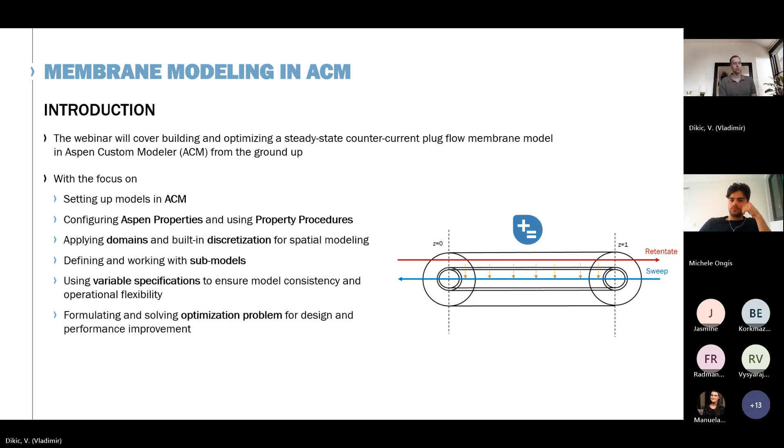So today our specific topic is building and optimizing a steady-state countercurrent plug flow membrane model in ACM, and we're going to look into how to set it up in ACM, how to configure Aspen Properties, but also use Aspen Properties procedures, how to apply domains and use the built-in discretization for spatial modeling, also defining and working with submodels using variable specification, and also formulating and solving an optimization problem in ACM.

Just quickly, so what is ACM? For anybody that's not used it before, it's an easy-to-use tool for creating, editing, and reusing models of process units. So you build your own simulation applications and you combine them in a graphical flow sheet.

You can perform dynamic and steady-state simulations. You can use parameter estimation, optimization, and all in an equation-based manner. So Aspen Custom Modeler provides a systematic way to model and also solve distributed parameter systems in which process variables vary both in space but also in time. And these systems are very common in engineering and science, and they're described mathematically by partial differential equations.

So the big benefit of ACM is that it includes a wide range of numerical solvers, so different discretization methods, nonlinear solvers, and optimization algorithms. What's also a big benefit of ACM is that it includes Aspen Properties. So anybody who's worked with Aspen Plus is familiar with this, and they can also be directly used in ACM, which...

...going to look into the 1D countercurrent flow membrane model. So in terms of the assumptions, it's a 1D model. In terms of the components, we're going to look into CO, CO2, hydrogen, and water. We're assuming a hydrogen selective membrane. We're also assuming isothermal conditions, and we're not going to consider pressure drop.

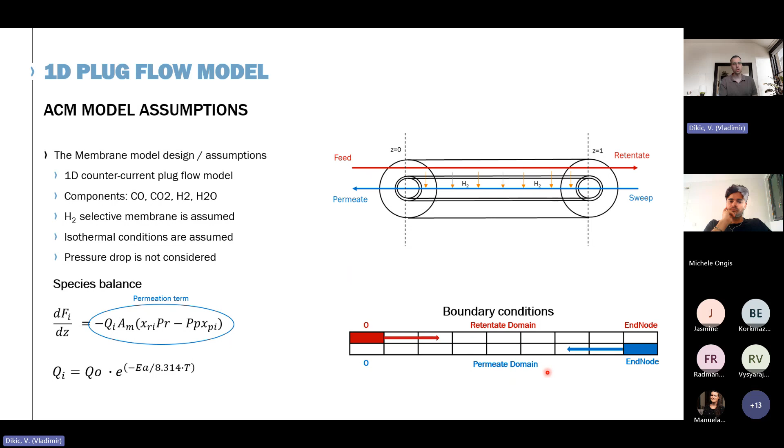So one on the retentate side and one on the permeate side, where on the retentate side, we're going to specify our boundary conditions at 0, and on our permeate side, we're going to specify our boundary condition at the end node. For this sort of a problem, we need to use 2 different domains with 2 different discretization methods, but I'm going to talk a bit more about it later.

So this is a very basic membrane problem, but you can actually do a lot more in ACM. So I'll just show you quickly also what I've been working with for the past few years. So in terms of the 1D model, you can also look into how to describe a full system geometry, the temperature and pressure effects. You can look into the dynamic operation, create a custom model flowsheet. You can also look into process control. So for example, in the Measure project, we're looking into the esterification reactor in combination with pervaporation units.

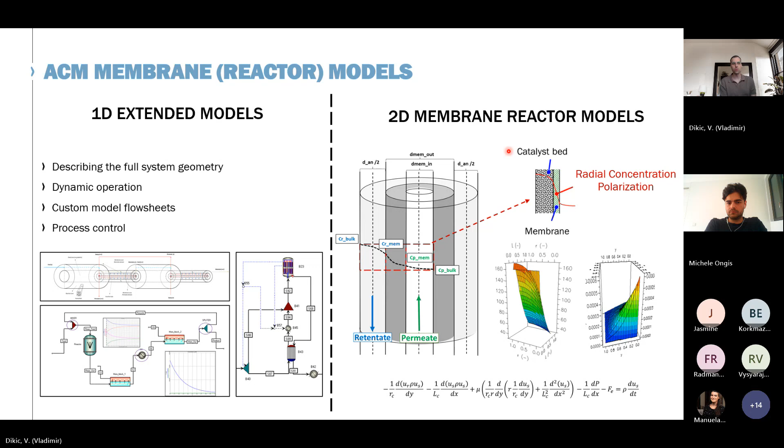But what you can also do is you can deep dive into a single process unit. So on the right-hand side, you can see the example of the 2D membrane reactor model that I've developed in the last year. So you can actually look at not only axial, but also radial phenomena that are very important for membranes or membrane reactors, like radial concentration polarization, drift velocity, and a lot more.

But before we continue to ACM, let's just quickly go through some important model elements. So first of all, variables. They define the values that can be either fixed or free in the model. So free variables are calculated, fixed variables are fixed. You can use predefined variable types, for example mole fractions, then you already get predefined variable boundaries, so from 0 to 1. But you can also use custom variable types, or for quick use, you can use the real variable type, which already has a broad range.

Parameters define the values that are fixed for the whole simulation, also considering dynamic simulations. Ports define the variables that can be passed in or out of the model using streams connected to the model. So for example, if your port carries flow, composition, temperature, pressure, you can take them into the model or out of the model. You can write your custom ports, but I would recommend using the mole fraction port SI, because that way you can easily export your models to Aspen Plus and it will recognize those ports.

Streams connect to ports, and they can, for example, connect an output port in one model and an input port in another, and they carry variables. So you can use connection streams for quick connections, but you can also use control signal streams. For example, they can be used for input and output variables connecting to PIDs, but also other units.

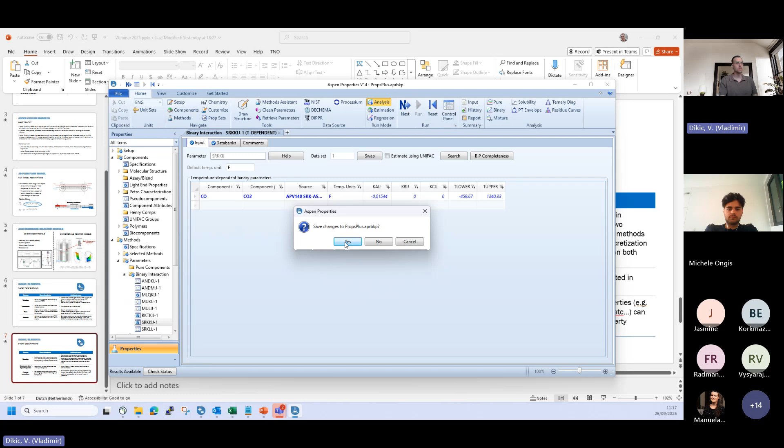And then we go next. And let's run. All right, and then we close and save properties. Basically, our Aspen properties are saved now, so we can add the components now. So then we go to the default, and we carry all the available components to the right. You can also select each component which you want, but now we will want all four, and then we click OK. So basically now we can start with model building.

We go to custom modeling, go to models, and then we click add model, and let's call it membrane. This is going to be our main code. And you can see here in the comments, so this is how you write a comment in ACM, with two slashes. You're not actually limited in how you want to define your parameters and variables. So you can do it in any way you like.

The only thing you're limited with is domains and distributed variables. You need to define your domain first, and then you write your distributed variables. But I'm going to do it in the way that I'm used to, the way I like it. So I usually define ports first. So let's define ports.

I would also advise, if you're just starting with Aspen Custom Modeler, to use Model Assistant. So in the Model Assistant, you have all your variables and parameters and submodels or ports, so this way you can define it more easily. So if we go to ports, then let's define our port system again. We have 4 ports. We have an input feed, output retentate on the retentate side, and on the permeate side, we have our sweep input port and the permeate output port.

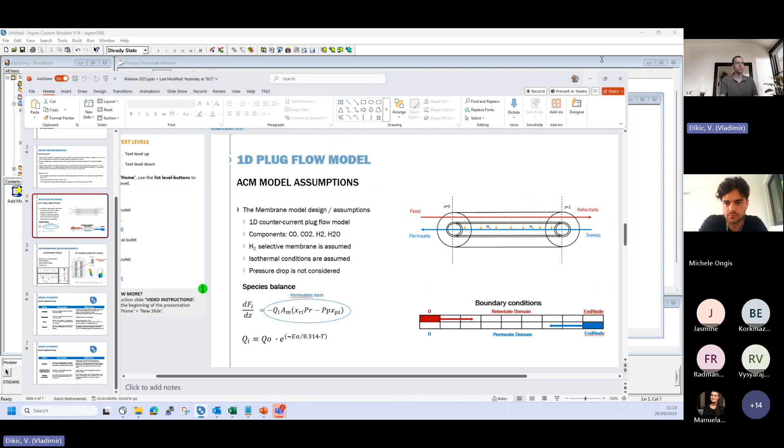So let's define our feed port. It's feed, and then, as I said before, I advise to use MoleFractionPortSI just because of easy exporting, and then we define it as an input port, and we click insert, and then we have defined the feed input port. I will show you actually what MoleFractionPortSI carries because that's important. So this is a predefined port. You can also build your own port.

So if we go to libraries and modeler and port types, here you can find Aspen's predefined ports. So this is the MoleFractionPortSI. And what you can take in and take out with this port is the flow rate, temperature, pressure, mole fractions, also molar enthalpy and molar volume. It's also important to note the units. So these are the units that are going to be carried over to Aspen Plus if you're exporting your model.

You can use whatever units you want, but if you export it to Aspen Plus, it's going to think it's these units. So just be careful about that. Okay, so let's return to the model.

Because we don't have much time, I won't be writing all the ports and the variables myself. So I'm just gonna copy them in the model. So let's copy other remaining ports. As I said, we have 4 ports, 2 input ports and 2 output ports. Also importantly, ACM is not case sensitive, so this doesn't matter.

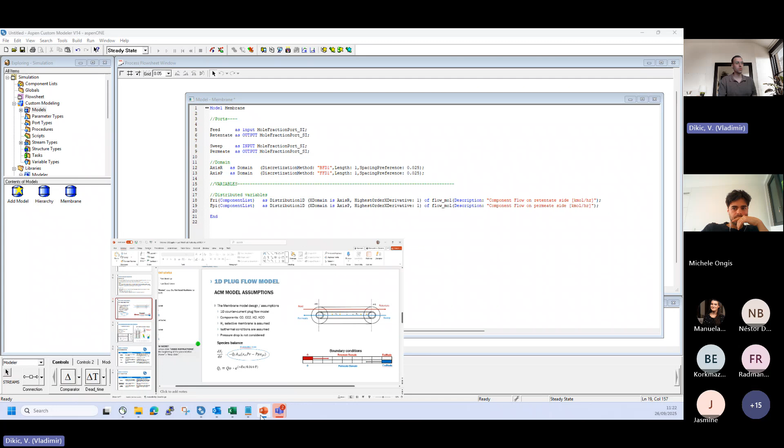Distribution variables are the only variables that are defined differently in ACM. These are the variables that are present inside your derivative. In our case, this is going to be component flow rates. So these variables have to be defined in a specific way. Because it's a component flow rate, it's in a component list, and it's defined as a distribution 1D. You have to define what is your X domain.

For our retentate component flow rate, it's going to be axis R, and for our permeate component flow rate, it's going to be axis P. You say that your highest order derivative in our case is 1, and you define it of flow mole. This is the variable type that's already predefined, and we can write a description. You don't have to write a description, but I like to add a description because I also want to take note of which unit I'm going to use.

Then we need to define our other variables. Other variables are defined slightly differently. They're not defined as a distribution, but still they're calculated from 0 to end node. For example, for our mole fractions, you define it because it's calculated for every component, and we're going to calculate it for the whole domain. We define it like this, and we say as mole fraction.

I'll also show you in the model builder, model assistant, this is where you can find your variables and different variable types. So for example, if I wanted to add mole fractions, you can find the type here. Mass fractions, you can find also mole fractions here, and all different variable types. You can also add descriptions here. You can write your lower and upper boundaries. You can define your spec. Is it either free or fixed? But you can also write it yourself.

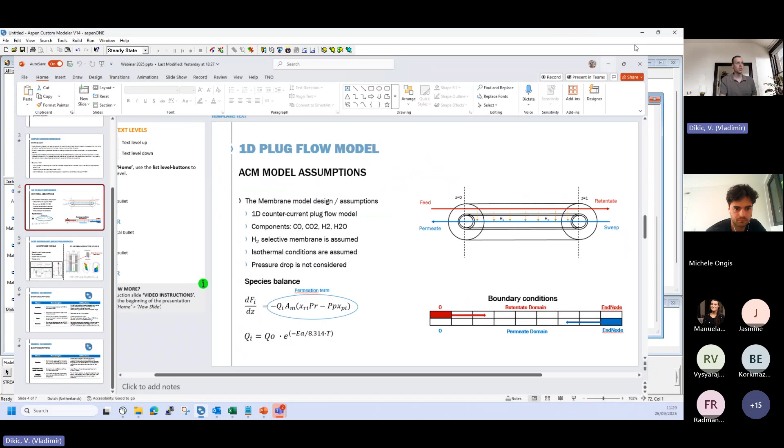Then we need to do the same for the permeate side. So unlike for the retentate, we define our boundary conditions at the end node, as you can see here. So we need to define the boundary conditions this way because this is a countercurrent system. So in a similar way, we add our flow rates, our mole fractions, our pressure, temperature, and we also calculate the component flow rate.

Then let's start adding equations in our submodel. But in order to use the submodel, first we need to send the variables to the submodel. So these are going to be variables that we're sending to the submodel. So in the permeance submodel, our activation energy is going to be sent from our main code. In this case, it's not even that convenient to use the submodel. We could just write it in the main code.

But for example, if you have a very large model, for example a very complex and large kinetic model, you generally want to put that in a submodel in a different code, not to clog up your main code. But basically here, we're going to send these variables, and then we're going to return permeance and driving force back to the main code. I need to close this. So these variables also need to be defined in the submodel. Let's define it. I'm going to copy the whole submodel at a time.

So we need to define all these variables. And you can see that, for example, in the permeance submodel, I define T as just T. You can just say that TR is equal to T, so that doesn't really matter. And it doesn't matter which side of the equation you write what in ACM. So even though we return this, you can write it in this way. So we're basically defining again the temperatures, our total pressure, fractions, activation energy, pre-exponential factor, and we're going to use those to calculate the permeance, and also to calculate the driving force, which is based on the difference in partial pressure. We're going to compile this.

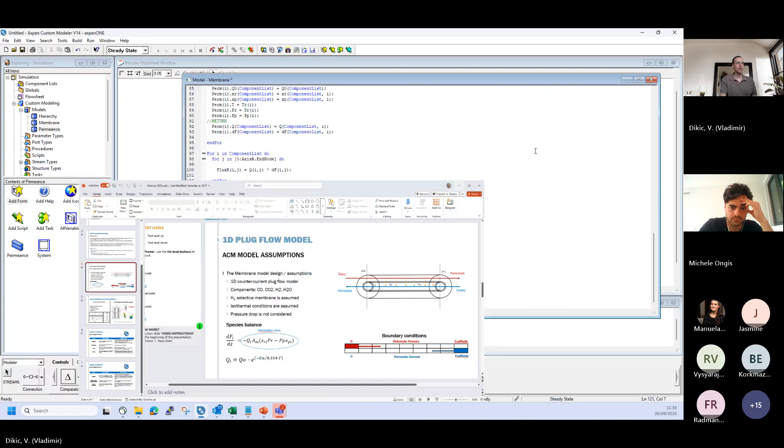We are adding a first order derivative of flow. And in ACM, this is how you write it. So first order derivative of flow over dx, you just need to write fr dot ddx. So it's a very simple way to write derivatives. But the only variables that can be written this way are the variables that you define as distributed. So you cannot write any other variables like this. You first need to designate them as distributed.

So basically, this is going to be dF over dx, and it's equal to minus flux times the membrane area. So we do this from 1 to axis end node. And why we do that? Because we have our boundary condition at 0. So we need to define it from 1 to end node. And for the permeate side, because we have our boundary condition at the end node, we define it from 0 to end node minus 1. So we do the same thing for the component flow rate on the permeate side.

And here, the only difference is that we define that it's from J plus 1. So why we do that? You don't have to do that, but you can get some inconsistencies. Because on the retentate side, we calculate our flux and we take our flux from 1 to end node, and on the permeate side, we get it from 0 to end node minus 1. So we can take the same flux to be consistent. So the amount of, for example, hydrogen that goes to your permeate side or is taken from the retentate side is not different. Of course, the more nodes you use, the more accurate this is going to be.

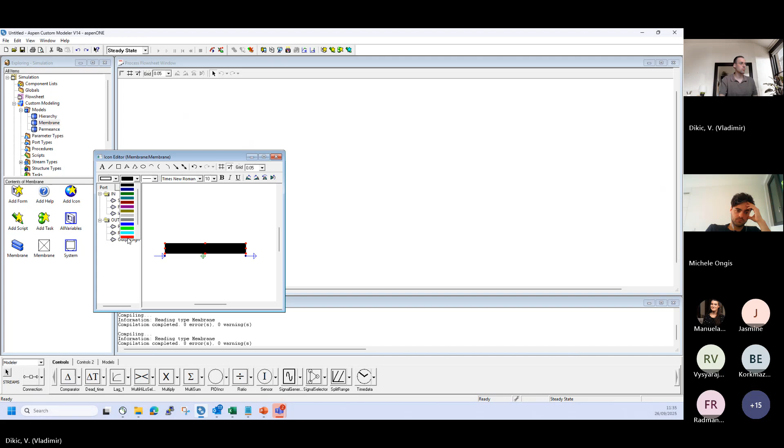Okay, so now we didn't add all the equations, but I'm going to already add the model to the flow sheet to show you that we're underspecified and how to deal with that. So let's add the model to the flow sheet. I always like to add an icon, make it so that it's more visual. Let's fill this, like in the presentation. We can copy this one, make this blue.

Then we can add our ports. Our feed is going to be here. Our sweep is going to be here. Our permeate is going to be here. And our retentate is going to be here. Close it and save it. And then we add the model to the flow sheet. This is going to be our membrane model.

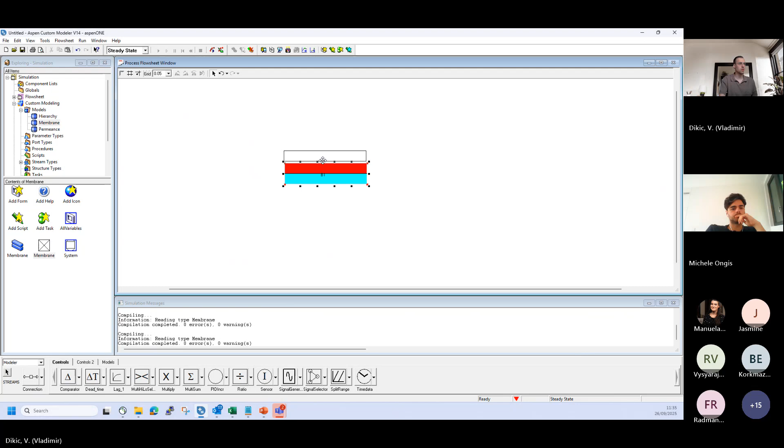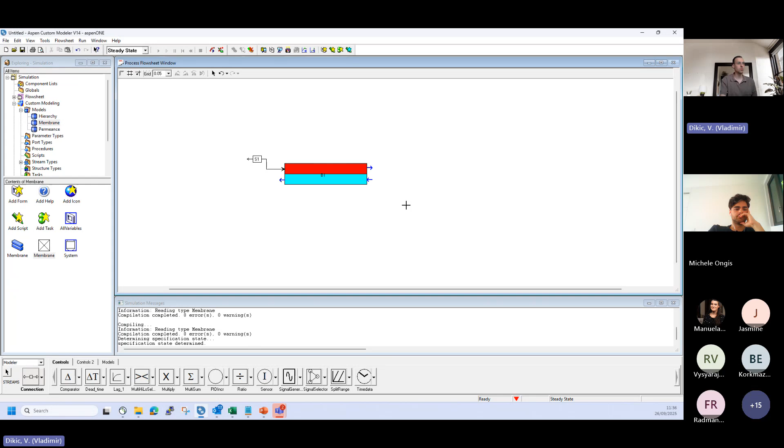And you can see here this red triangle. That means that the simulation is underspecified. So we need to add more variables and more equations to this system. And let's do that. But first, let's add our streams. So we can use the connection streams and we can add it to our port. So this is going to be added to the feed port, sweep port, and output ports also. So we can rename this feed.

Retentate and permeate. First, what we can do is add our feed conditions and our sweep conditions. You can see here that these variables are free, so we need to fix them and provide the values. And what you will also see is that the number of underspecified variables is going to drop down from 335. If we put this to 6, it goes to 334. So this is the part of the problem that is still underspecified.

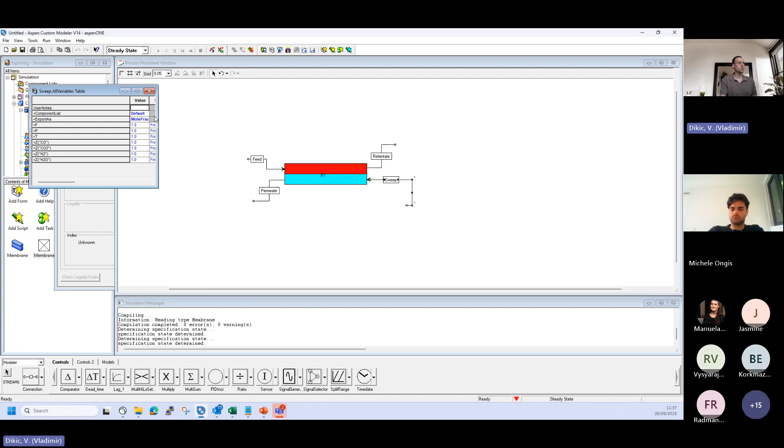So let's add that, but I'm going to add it from an Excel sheet because it's faster. These are going to be our feed conditions. We're going to use 30 kilomoles per hour at 20 bar at 100 degrees and 50% hydrogen. So you see now that our simulation dropped down in terms of the underspecified variables. Let's do the same thing for the sweep. On our sweep side, we're going to use 15 kilomoles per hour at 1 bar at 100 degrees, pure water. And you will see that our simulation dropped down in terms of underspecified variables.

But still, this is not enough. We need to add other equations to the system. If you notice here, we added the total flow rate only at 0, so we need to calculate the total flow rate for the entire domain. Same for the mole fractions. We already defined our temperature and pressure for the whole domain, so let's add these two for the permeate and the retentate side. Component flow rates, on the other hand, are calculated through the ODEs, so we don't need to define any other equations for that.

So let's add total flow rate. We will calculate it from 1 to end node. It's going to be the sum of component flow rates. And we're also going to calculate mole fractions based on the component flow rate and the total flow rate. So if we compile again, you will see that the number dropped significantly. Now we're missing only one fixed variable, and I know which one that is, but we're going to add it a bit later. So let's add our other equations that we're going to need.

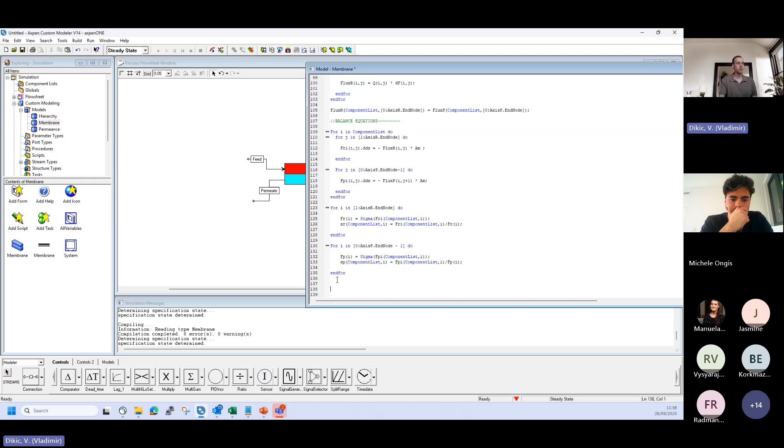First, our hydrogen recovery, which is going to be based on the amount of hydrogen that permeated. And let's add our streams. If you notice here, we have an input stream from sweep and feed, but if we double click on the retentate, we don't see anything. That is because we didn't define it inside the model. Here we call the ports for the input, but we didn't specify the output port equation. So let's do that first.

These are going to be our output streams. We're going to say that the flow rate at end node is equal to retentate.f. This way, we say that our flow rate at the end node is going directly to the output port, and this is where we can get the value. We do the same for all. And you notice here that I also defined the enthalpies. We didn't calculate this, so we're going to call an Aspen property procedure. How do you do that? It's very simple, actually. You use a call function.

In order to calculate the enthalpy at the output, we need a special call, and we provide it with the temperature, the pressure, and the mole fractions. If you want to check what you need to provide for a specific property, you can go to help, go to contents, write property procedure, go to overview, and find the specific property that you want to get from Aspen. For example, we want to get molar enthalpy, so you will see what you need to provide.

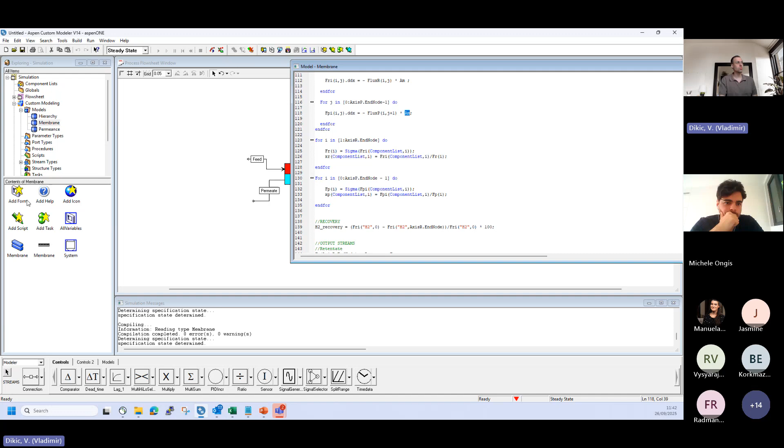So let's create a new form where we're going to define the result variables that we're going to use. You go to membrane, you click on add form. We're going to create a table, and let's call it results.

Then you right click, go to properties, variables, and here let's add a few variables. So we're going to add our membrane area. Let's add hydrogen recovery. Let's add profit.

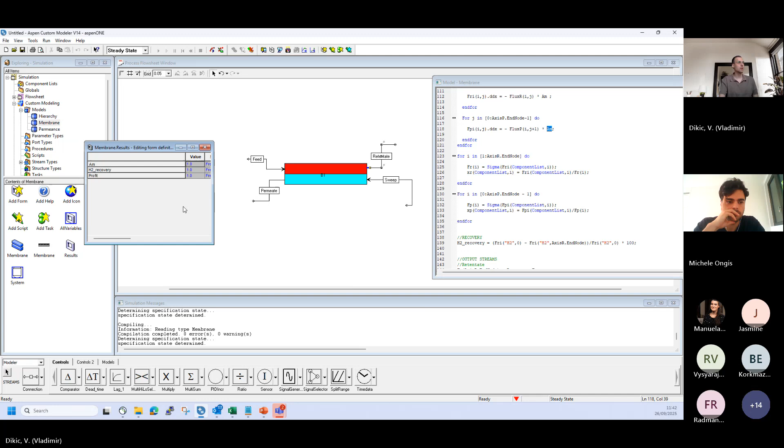Now that it's defined, we can go to the model. You right click, forms, results. So we can see it here. So you see that the membrane area is free. So let's fix it. And our model is going to be fully consistent. So now we can actually run the steady state simulation.

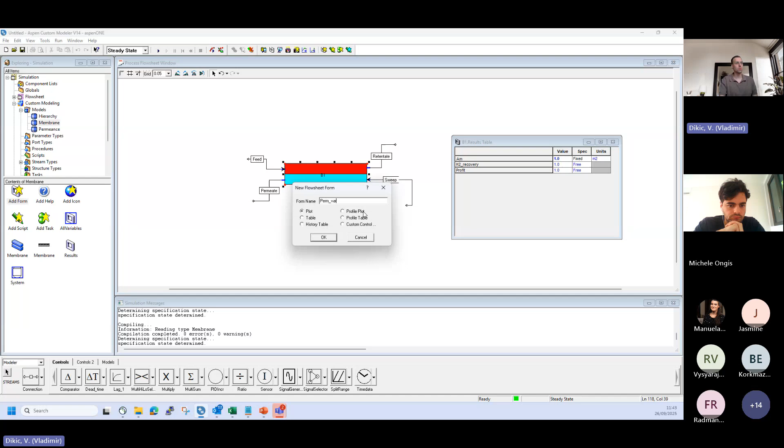But first, I still didn't add the values for the energy of activation and other variables. So let's add also that. So let's make a new table for var, and we're going to add missing values for the variables. So properties, variables. And let me show you what I mean. Let's add our energy of activation and Q0.

We add energy of activation. So what the star means, it means for all the components or for the whole domain. So the star means everything inside the set. Click add variable, and then we're going to add Q0 also. So we star, and we can also check the permeance value, which we're going to calculate.

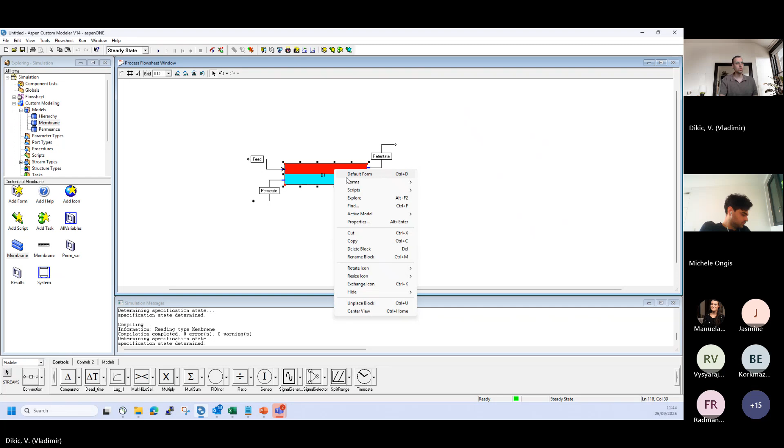But permeance is not only defined in the component list in the main code, but also for the domain. So what we can do is we say Q star star. Then let's go model forms. Go to this table, and you can see that by default, it added a value of 1. I wrote in the code they're fixed, which they should be. So because we have a hydrogen selective membrane, we're going to add only the values for hydrogen. So these are zeros, and here I added the values for the hydrogen.

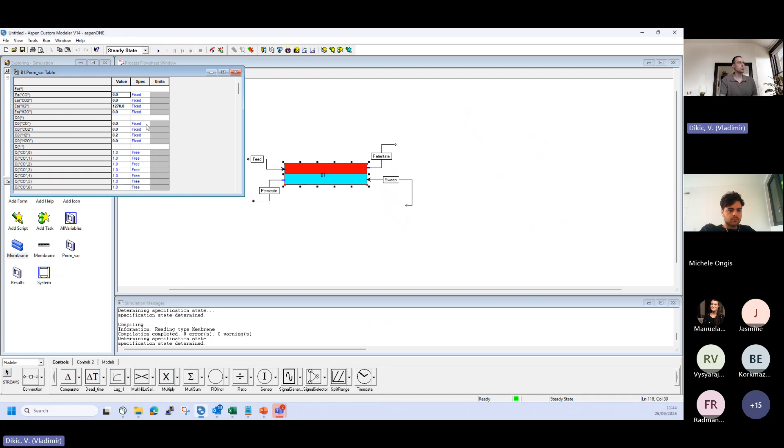And then let's go back to our results. Here, so let's give it a try. Let's say 5 square meter membrane. So let's see what's gonna be our resulting hydrogen recovery. We click play, and the model is solved. So we have about 38% hydrogen recovery. You can also see the permeance values here. Of course, for other components, it's 0 because we only permeate hydrogen.

So what you can then do in terms of variable specifications: for example, if you want to reach a specific hydrogen recovery, you can fix recovery, but then free your membrane area. So if we wanted 75% recovery, you can just fix that, click play, and it will tell us, for the 75% recovery, you need this much area.

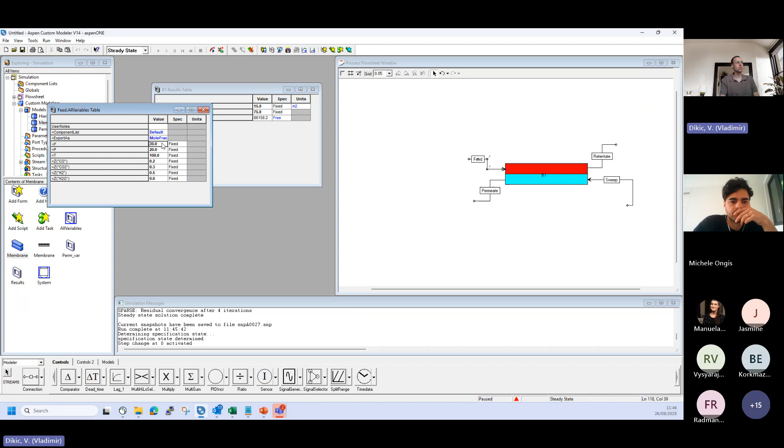What we can also do is, for example, fix the area. You can see now that we're overspecified by 1, but then we can free something else. So let's say for 15 square meters and 75% recovery, what would be the molar flow rate? Then it calculates the molar flow rate at 35 kilomoles per hour. Let's fix this again, so the 30 again. Let's free our recovery again.

I will now also show you how to use optimization in ACM. Because, for example, if you notice here, let's put it at 8, maybe 5,000, or we put it at, let's say, 20. Again, 5,000, but if we put it at 15, it's going to be higher. So we can find what would be the optimal area to reach the highest profit, because of course we want to maximize the profit.

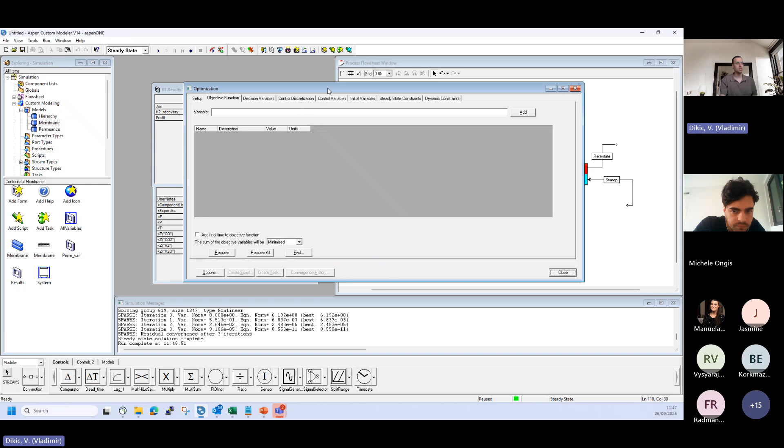So let's go here, we click on the process flow sheet, we go to tools, and we can click optimization. You can either choose to perform steady state, or a dynamic optimization. Because this is a steady state problem, we do a steady state optimization. We go to the objective function, and our objective function is going to be the profit. So let's add it, because we need to add it from the model.

Now it's called B1; we can rename it to something else, but let's keep it at B1. So we say B1.profit. So it's going to take the profit variable from the model B1 and use it as objective function. We say here maximize, because of course we want to maximize it.

And then we go to decision variables. So this is where we specify what we're going to vary. In this simple case, we're just going to vary the membrane area. So again, we say B1 from that model, we take AM, and then we add our membrane area here.

So you can define your constraints. So what is going to be a lower and upper boundary of this variable? So maybe let's say that we have max 50 square meters. In terms of the control discretization or control variables, we don't need to look at that because this is more for optimization for control. And also with steady state constraints and dynamic constraints, we don't need to define that.

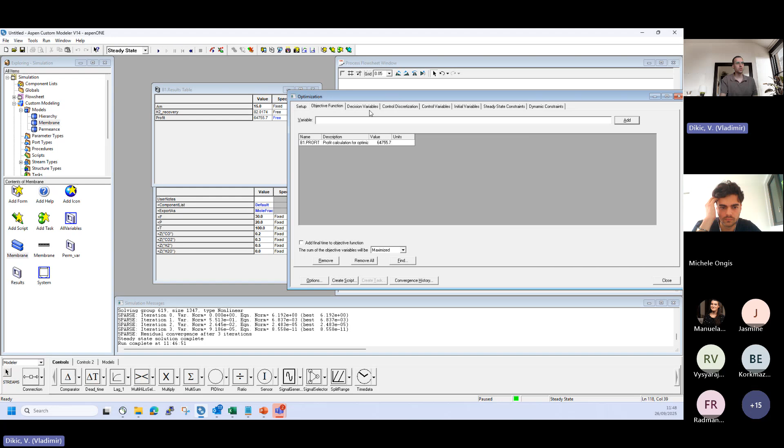So now that we defined our objective function and our decision variables, let's run an optimization. So we go here where it says steady state and we put it to optimization. So play. Yeah. So now it found the optimal point. So our profit is highest when the membrane area is 15 square meters.

Now that I see that we have a bit more time, and I don't know if there are many questions because I didn't look at the chat. Oh, there are no questions in the chat. Oh, okay. Well, maybe then I can show you also how to create a profile plot. So, because we still have 10 more minutes, I was thinking also to do that, but I didn't know if we're going to have enough time. So I hope I was not too fast.

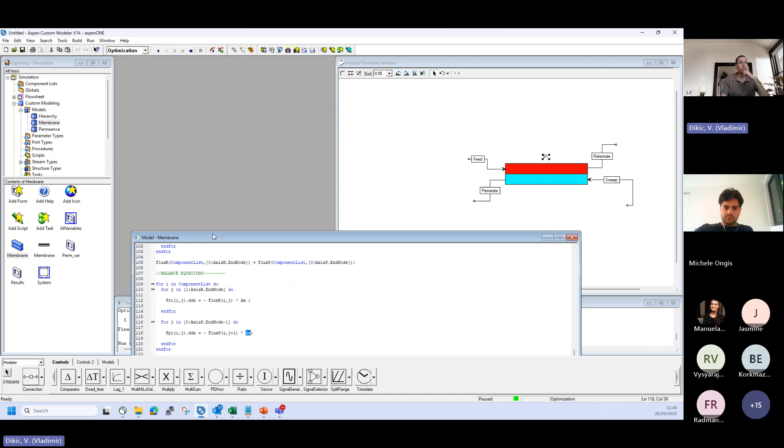So you can also create profile plots in ACM. So maybe we can do that to see in a visual way your driving force, so your difference in partial pressures. So let's create a new variable that's called partial pressure. So we're going to do that on the retentate and the permeate side. So let's create those. They're going to be hydrogen partial pressures on both sides.

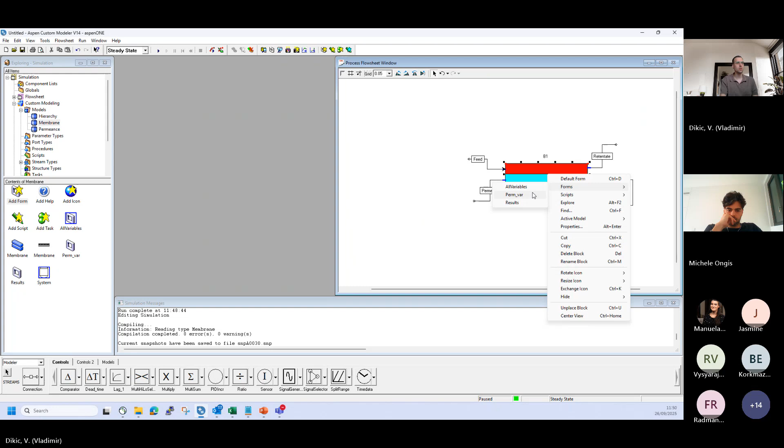And let's also add the equation for that. So we can add it, doesn't matter. We can also add it here. In ACM, it doesn't really matter where you add your equations. So we'll say that partial pressure on the retentate side is equal to the total pressure times the molar fraction of hydrogen. We compile again. This off. Let's go to steady state again. We can leave it at this value.

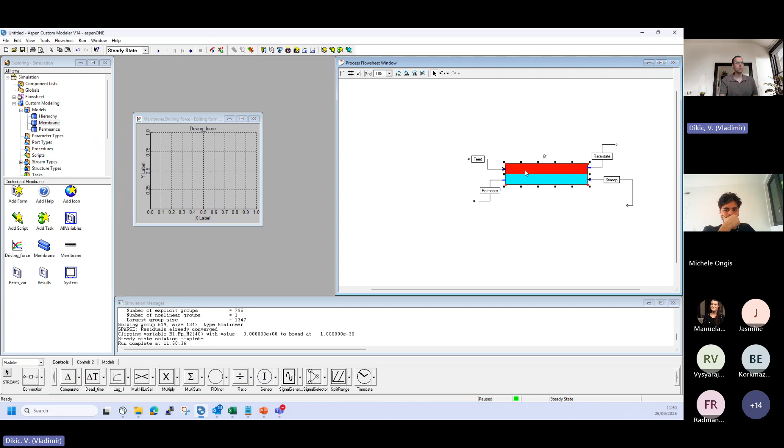Now, if we want to create a profile plot, go to forms again, membrane, we create a profile plot, call it driving force. Then we can add new variables. So if we go to forms, all variables, we can find partial pressure. Let's take partial pressure on the permeate side of hydrogen. Here. And then also take PR hydrogen and we carry it here. You need to go to profile variables. So let's call this partial pressure hydrogen. This is PR of hydrogen.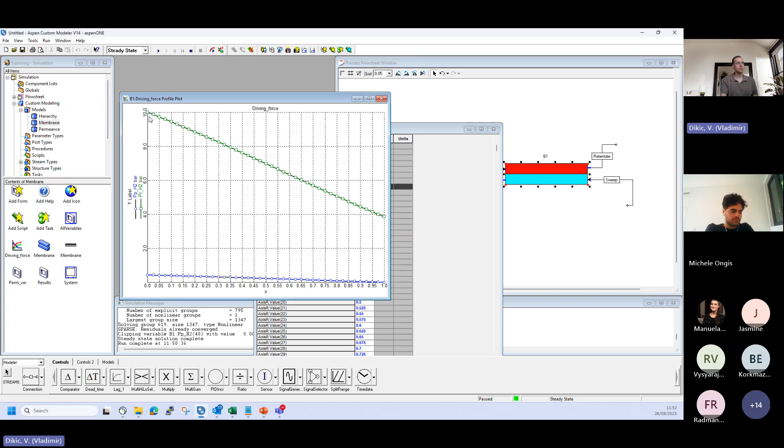And what we can also do is we can add our domain so that we know where it's distributed. So like this, let's add this, call it X. So these profiles are going to go to profiles to plot, and X will go to X-axis. Click apply. And you see we have two different axes. So let's put it in the same one. So in properties, axis map, you go all in one. Now we can also plot our driving force, and we can see our difference in partial pressure.

So yeah, that is all that I wanted to show for today. And well, we have a few more minutes, so if there are any more questions, I'll be glad. Yeah, of course, if there are questions, feel free to write in the chat. But maybe I was thinking, since we have a few more minutes, about how to export the model.

So basically, the way you export the model is you go to the membrane. For example, this is our main model. You right-click, and then you say package model for Aspen Plus or HYSYS. So basically here, you can create a model initialization script, which is going to help it to be solved in Aspen Plus. Basically, it will take the solutions of your simulations, or you can choose which solutions you take for the initialization script.

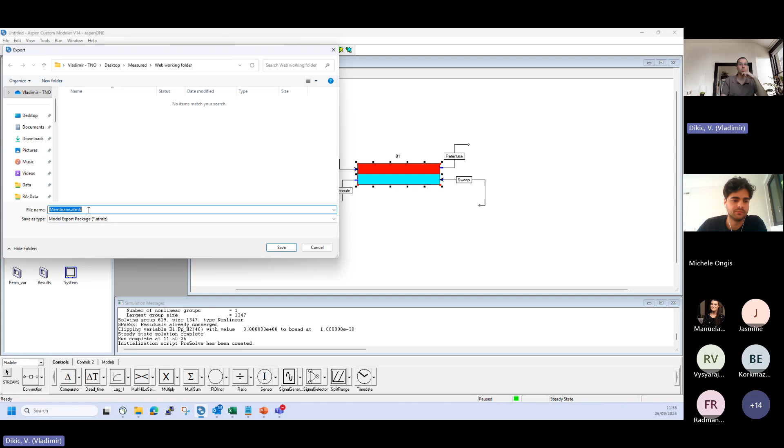You click yes. We say it for B1 because that's the model that we want to use, and we create a script, and then we're going to create this ATMLZ file that needs to be installed in Aspen Plus. But it will also ask us now if we want to install the model right away. So we say yes, and then if we go to Aspen Plus, we can find the model when we turn on ACM models.

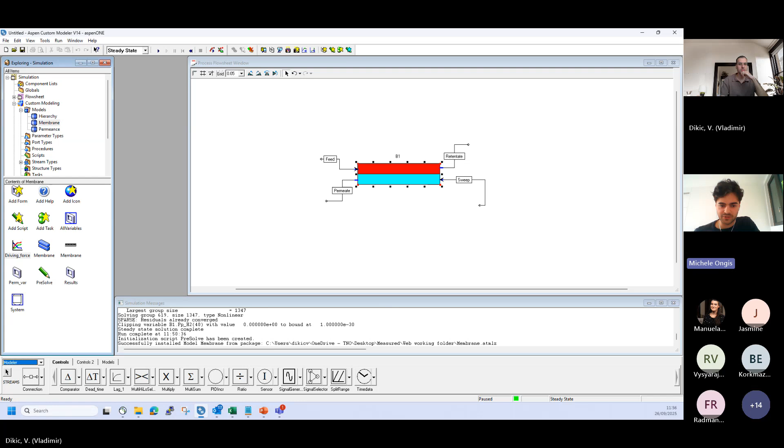Is it possible to use a feed with properties varying in time? I guess it means dynamic. Yeah, so it is. What you can use is this time data. In the time data, in configure, you can define your number of points and your sample time. And then, for example, if we say number of points 1,000, here you can define your variable that varies in time.

And then you can connect this time data to your model, and then dynamically you can vary it. So you probably have to create a few of these time data units. So one to be this flow rate, or this one to be, I don't know, this composition. But yeah, you can do it that way. That's the fastest way.

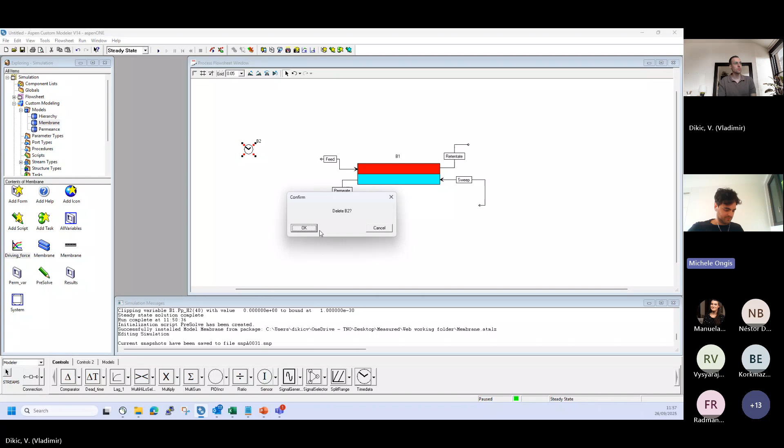It's very interesting. Okay, we have 3 more minutes. So if there's any final question, otherwise I still have a few questions.

One is, based on your experience, your suggestion about the number of nodes. I think you put 20 in this example. 40. 40? Yeah. I think maybe the best way is to see what your model error is. So you can calculate, for example, the difference between the amount of component that permeates on the permeate and the retentate side, and you can see, okay, if I use 10 nodes, what my result is going to be.

More nodes is not always going to be better. Yes, it's going to be more detailed, but it's also more computing power. So you can do quick checks and see where your results are already satisfactory. Maybe you don't need to go above 30 nodes for a certain problem. Maybe you want to go to 100. It's about testing, not that there is a specific value. Okay, makes sense.

Okay, two more questions. Is it possible the simulation does not converge? Well, that's not only possible, but very common. And what do you do in this case? That's actually the biggest part of Aspen modeling, because I chose an example here where everything converges right away, but not converging is the biggest part of solving this. You need to do a lot of tricks, a lot of initialization. That's a question by itself, but not enough time here.

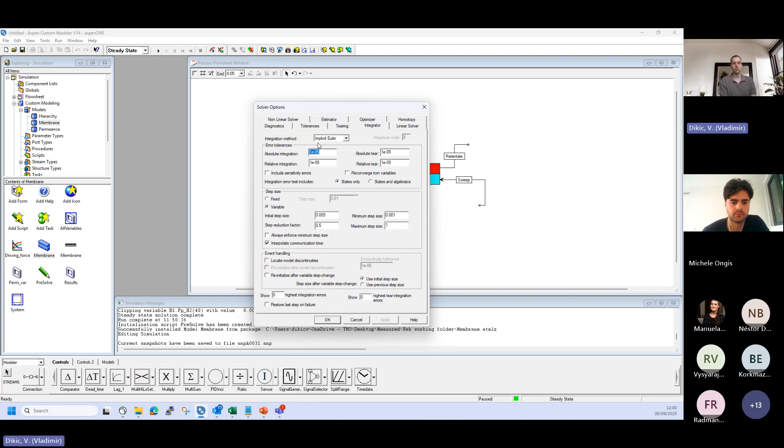Generally, it uses a mixed Newton method, but sometimes it goes to fast Newton, depending on the problem, to solve the system of nonlinear equations. And then if you go to dynamic mode, you use an integrator. Generally, I always use the default implicit Euler, and I never really had problems with it. It's fast enough. So in steady state, you solve nonlinear equations, and then you integrate in dynamic mode.

Another interesting thing to add on this, since we are talking also about solver and convergence, is that when you have to change a variable, say in a broad range, you can use the homotopy setting to change it gradually from one point to another. I don't know if it's relevant, but sometimes when you have a problem of convergence, because maybe you change a variable too much, you can gradually change it by using the homotopy tool.

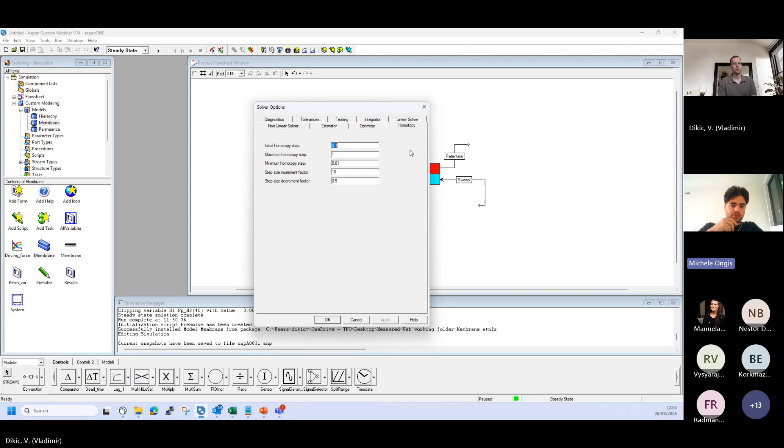Or you can also do it by hand. You can. Or you can also do it by hand. Yeah. Of course.

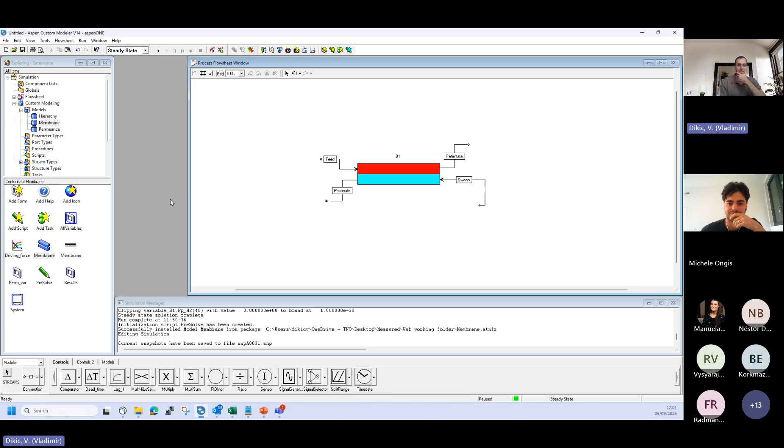Okay, so it's 12. I don't see a question, although you didn't explain the easiest trick to do that, but we can also leave the people with curiosity. Oh, I forgot about that. Yeah, okay. I can stay for 5 to 10 more minutes. So if everybody wants to stay, I can also show that. And since it's recorded, it's always useful. In the worst case, even if some people have to leave, they can still catch up.

So basically, there's something in ACM that doesn't work as it should, but actually works in your favor. When you have countercurrent systems, if you want to be numerically consistent, you would do this. And also, Aspen recommends to do this because you have two domains that have to be solved with two discretization methods, just by the nature of how you set your boundary conditions. But actually, something else works that shouldn't work: you can actually define only a single domain.

For example, if we just define this axis R, and then we went to the species balance, and we say set from 1 to axis end node. And we also took this balance on the permeate side. We took this here. We don't need this +1 now. And for example, if I comment this out, I don't know if it will work now because everything else has to be set up in a similar way.

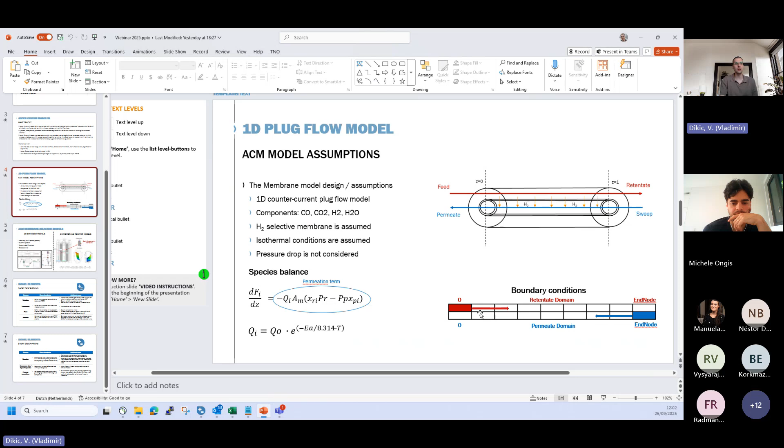But this should never work, actually, because we're solving also this permeate side from 1 to axis end node. And that shouldn't work because at end node we have our boundary condition, meaning that at 0 we're missing a variable. So this should not be consistent. But for some reason, in ACM, it works. I also approached Aspen with this comment, and they said, oh, we don't know, it works. So you basically define one domain, and in the differential equations you write it from 1 to end node, even though this one is from 0 to end node -1, and it still works.

Let's compile it. Maybe it will work even now. I'm not sure, it seems that it will work. Ah, no. Okay. Well, you need to write it from the beginning, and you need to define the single domain. Basically you can define one domain, write your balance equations inside, in the single loop. This will work.

Other equations, like this total flow rate, need to be defined in the correct way, but differential equations need to be defined in the wrong way, and it will work. So yeah, that's a quick tip that you can try. It's also much faster and much simpler. And Aspen doesn't know why it's doing that. Oh, that's a very interesting tip.

Just a question that came up. You try to solve the system and it says not possible, singular decomposition. Yeah. This happens when you have some zero denominator for some specific reason. Here the problem was also that all these variables are defined in a completely different domain, and I tried to solve them in XSR, but this is defined in XSP, so that's why. So it can be a lot of different things.